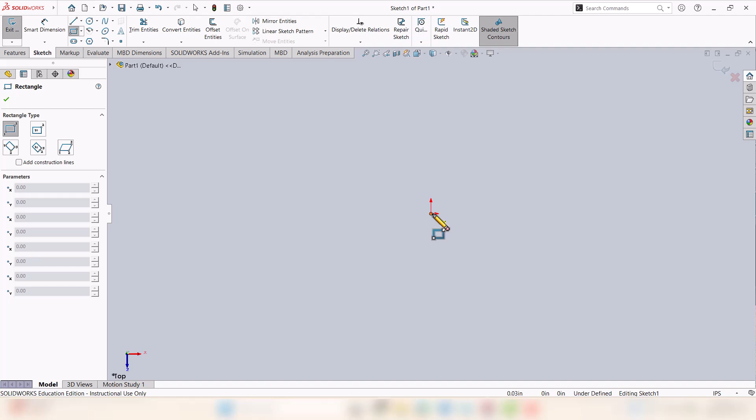We could anchor the rectangle to the software origin like that, but because we're going to create a rib in the middle of the part, it will be convenient to keep the origin in the middle. So let's try that. I'm going to undo that and then go into rectangle.

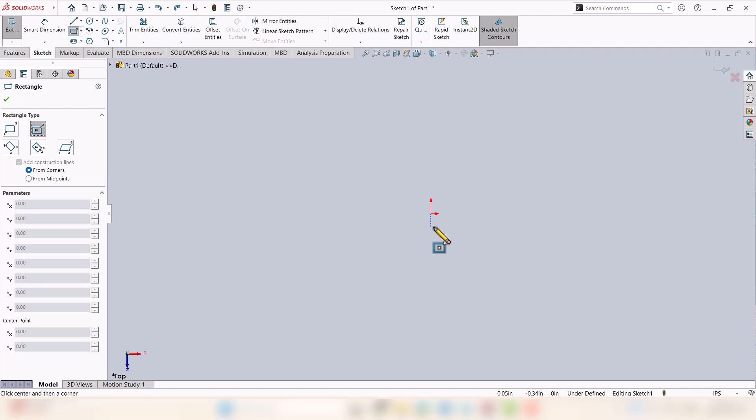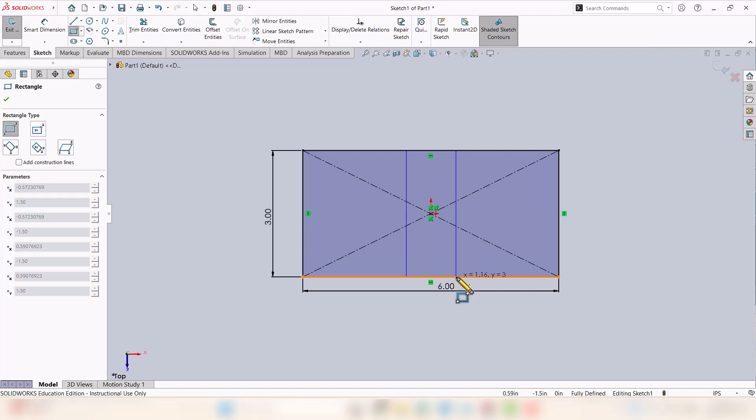This time we'll pick the center option and create a rectangle, dimension it. Let's make it 6 inches long and 3 inches wide. Create another rectangle, something like that here, and dimension it from the center or from the middle. Let's make it 1/2 inch. Let's dimension the other side as well, make it 1/2 inch.

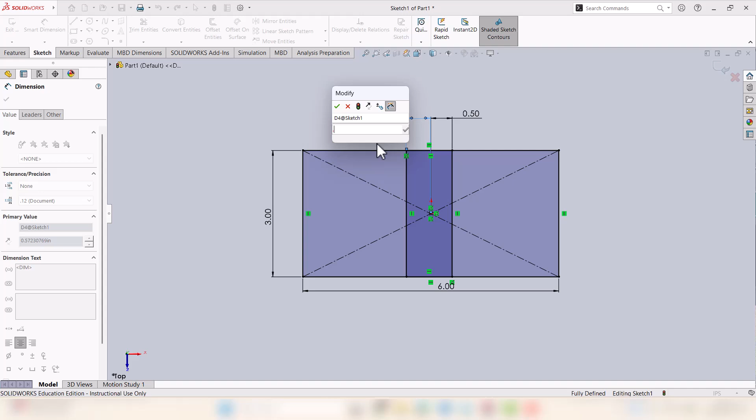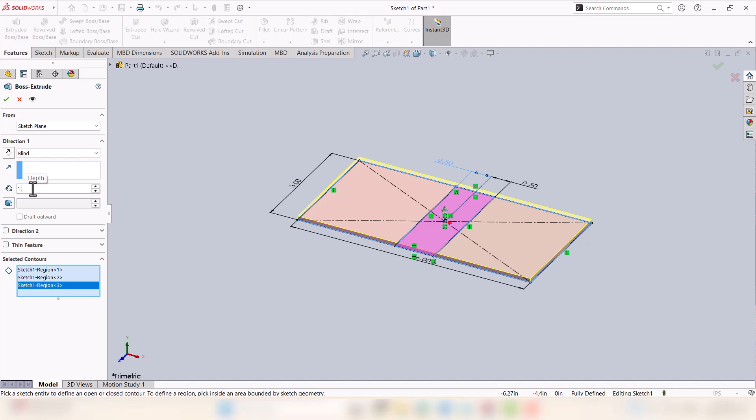All right, so that's our basic sketch. Let's go into features and extrude. I'm going to include all 3 sections and extrude 1 inch. Then we're going to extrude the middle section only.

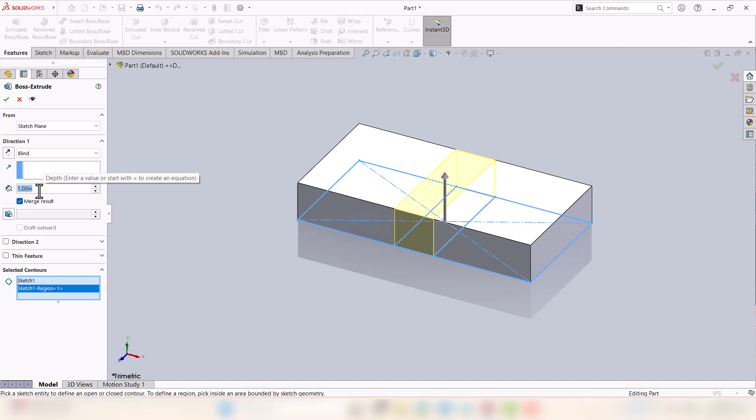So we have to say okay first to this, and then remember, we're going to expand it, click on that sketch, and I'll add another extrude, but this time only for that middle part. Let's do 3 inches. Okay, so that's our basic model.

So now let's create a rib in the middle. Change the view to not see the shadow. A couple of things to remember: the sketch we're going to create for the rib needs to be a new sketch. It cannot be part of the previous sketch. We would just need one line to create the rib, basically.

So let's start a new sketch, like I said, and create one line. This line we're going to create in the front view. That's why I was saying it needs to be a new sketch, and it should be in the middle, because now when I create the line in the front view, it will only create it where the origin was. So we're going to anchor it to both sides, like the wall and the floor. That's the other thing with the rib: this sketch needs to be attached to your model on both sides, both ends of this rib line should be attached to the model.

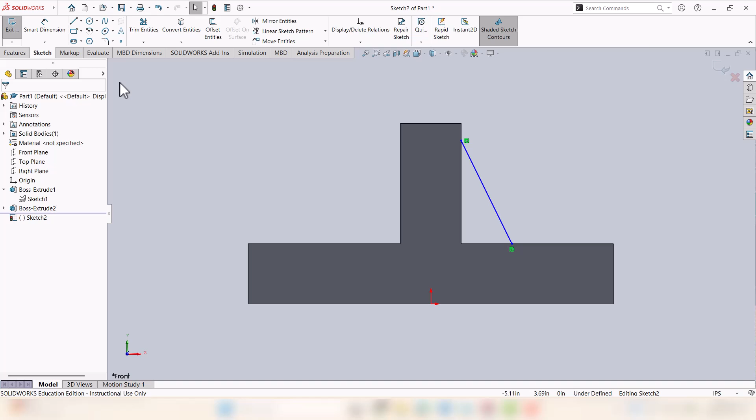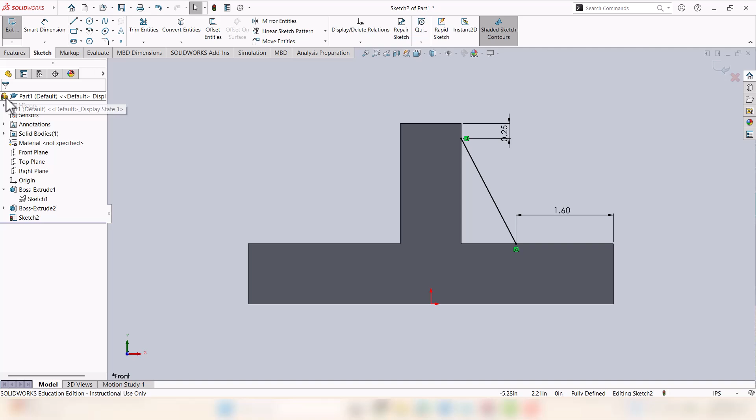If they are not, that's one of the reasons the rib tool might fail. And then we're going to dimension it. So from the top to the start here, 1/4 inch, and I can dimension from this side to here, let's make it 1.6. And that's good. So now, as you can see, our sketch for the rib is fully defined.

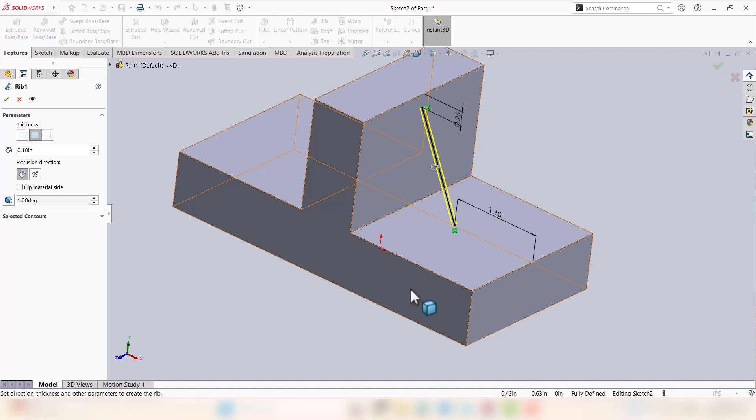Next, we will go into features, and in features we have this rib feature. Once you click that, it will pick up that last sketch by default. The only thing now is we have to make sure that arrow is pointing in the right direction, and that should be towards the model, so downward. We could switch, if it's pointing the other way, we can flip it from this button here. See, now it goes towards the top, and now it switches. From here we can control the width of the rib, so let's make it 1/4 inch, and then say okay. There we have our rib.

Remember, sometimes the rib will fail. The main reasons would be: one, if the ends are not attached to the base model. Secondly, it can fail if the rib sketch we created is not a separate sketch. Another reason could be if, like we mentioned, the arrow is pointing in the wrong direction, that would also fail the rib. Sometimes if your base model has some feature where we are shelling it or applying other features, it might conflict with the rib and fail it. So what we need to do is make sure that first you create the rib and then you add other features to it.

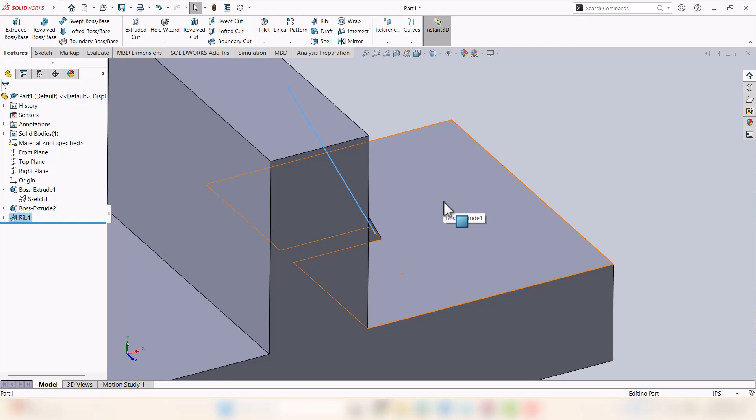All right, so let's practice it one more time. You're going to create another rib on the other side. Now remember, if I wanted to create another rib, that rib sketch has to again be a separate sketch. So we cannot even have two rib sketches in the same sketch, right?

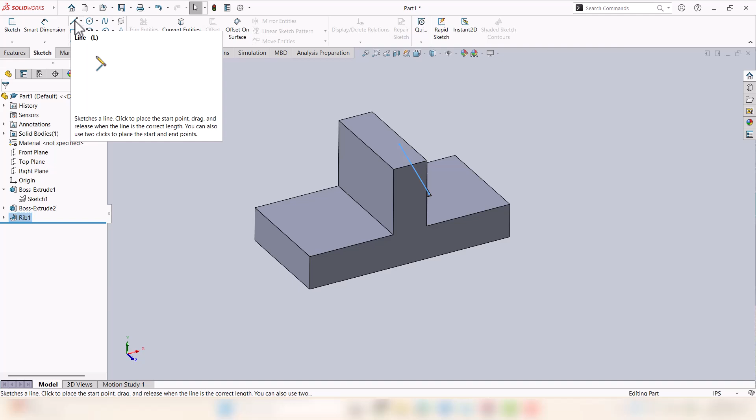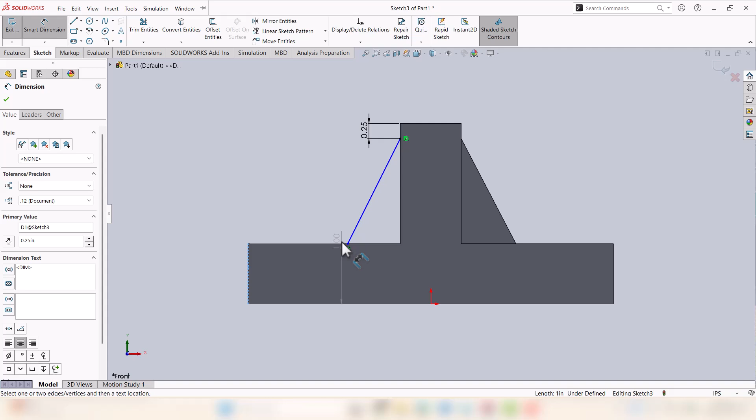So now that once that is done, I will start a new sketch again, and create a line, and I'll select that I wanted to do it in the front plane. And once again, we would make sure it's attached to the model. Escape, dimension it. So once again, same dimension we will follow, 1/4 inch from the top, and it was 1.6 from this side. Done, sketch is fully defined.

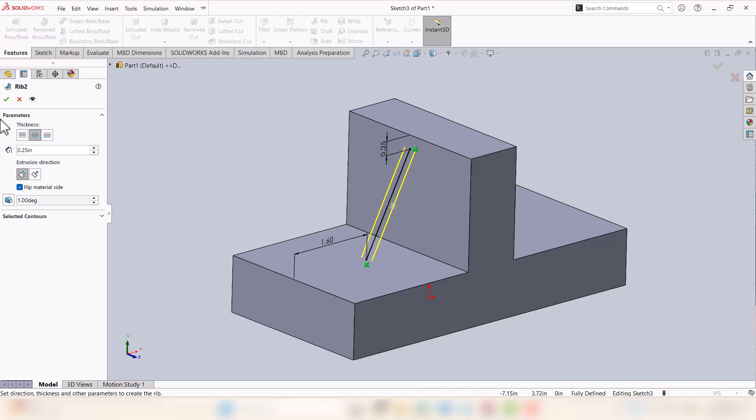Going back to features, rib. See, this time the arrow is pointing towards the top, so I would flip it. It should always be pointing towards the model, and then you say okay. So we have the rib on this other side. Okay, so that's the basic feature.